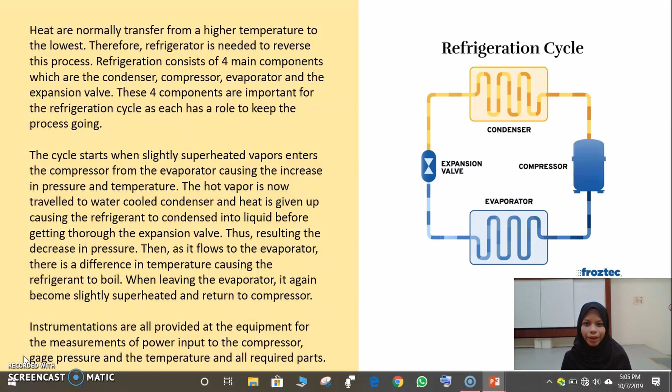So, instrumentations are all provided at the equipment for the measurement of power input to the compressor, the gauge pressure, and the temperature, and all the required parts. So, this refrigeration cycle can be applied in the refrigerator and air conditioning in our daily use. Next, I will explain about the theory of the experiment.

The method and the purpose have already been explained in the introduction. The principle of refrigeration: liquids absorb heat when changed from liquid to gas, and gases give off heat when changed from gas to liquid. And the vapor compression refrigeration cycle has 4 components, which are the compressor, condenser, expansion valve, and evaporator. Okay, first, the refrigerant's low pressure gas will flow into the compressor, and it will be compressed.

As it goes out from the compressor, it will go as a high pressure gas, and then the high pressure gas will flow into the condenser, where it will be condensed from gas into a liquid. And as it condenses, it will give off the heat to the surroundings. And next, the high pressure liquid will flow into the expansion valve, and the liquid will be restricted, and its pressure will be lowered.

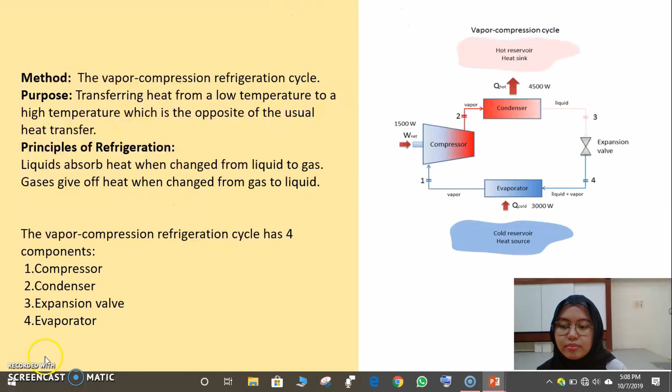And then the low pressure liquid will flow into the evaporator, and it will evaporate from liquid to gas, and it will absorb heat as it evaporates. And finally, the low pressure gas will flow back into the compressor, and the cycle will be repeated again. Next is the objective of the experiment.

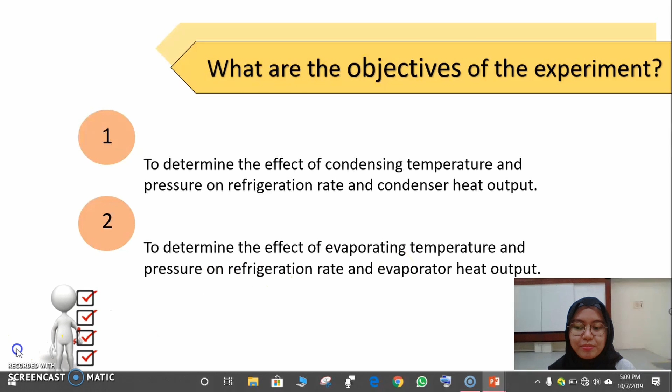First is to determine the effect of condensing temperature and pressure on refrigeration rate and condenser heat output. And the second one is to determine the effect of evaporating temperature and pressure on refrigeration rate and evaporator heat output. This goes to the evaporator, where it absorbs the heat in the refrigerator with the assistance of the evaporating liquid refrigerant. As the liquid evaporates, it decreases its temperature according to the decrease in its pressure.

Then it passes to the third component, which is the condenser. And the function of the condenser is to convert the refrigerant into the liquid form, reducing its temperature. And in the condenser, the heat flows out of the system to the environment. There are other components such as the barometer and the flow meter. The barometer measures the pressure inside the evaporator and the condenser, and the flow meter controls the flow rate of the fluid of the evaporator and the condenser respectively. And all the components are shown in this picture.

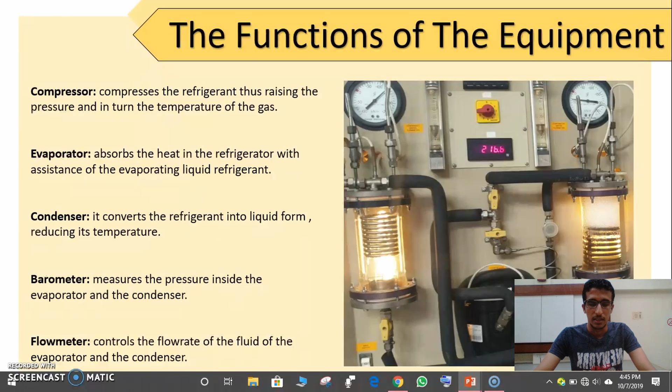And now for the operating procedure. After we all ensured the start up of the unit of the system by turning on the compressor and opening the water supply, we were ready to start our main experiment. And we started the main experiment with the first step, setting the evaporator water flow rate to 20 grams per second and allowing the unit to run for about 5 minutes.

Because the flow rates of the evaporator and the condenser are the main 2 parameters in the system, we need to fix one of them so we can have a precise measurement, and we chose to fix the flow rate of the evaporator to 20 grams per second and start with 30 grams per second for the flow rate of the condenser.

After that, we recorded all the system parameters, including the temperature in and out, the pressure, and the power consumed by the compressor. The third step was to reduce the condenser cooling water flow rate until the condenser pressure increases by approximately 10 kilonewtons per square meter, or 0.1 bar.

As we decrease the flow rate of the condenser, the pressure of the condenser increases, allowing the unit to stabilize. And again, we recorded all the parameters to study the effect of reducing the flow rate of the condenser and the other parameters such as temperature and pressure in the system.

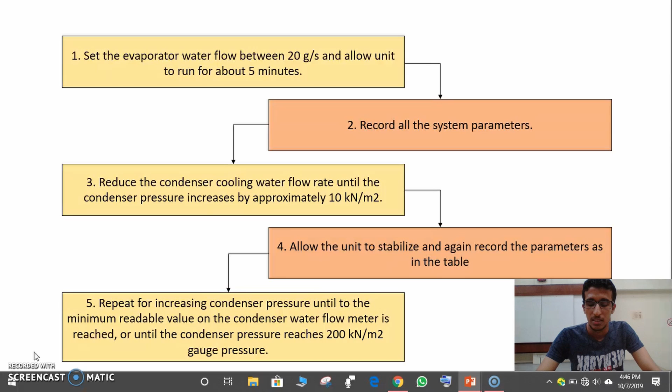And lastly, we repeated for increasing condenser pressure and decreasing the flow rate from 30 grams per second to 20 grams per second to the minimum readable value on the condenser. Discussion and results will be discussed next.

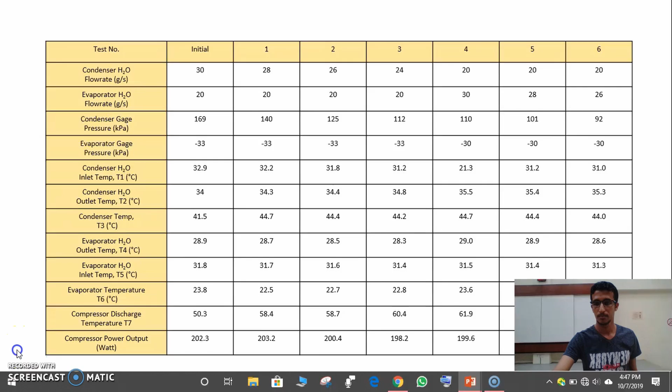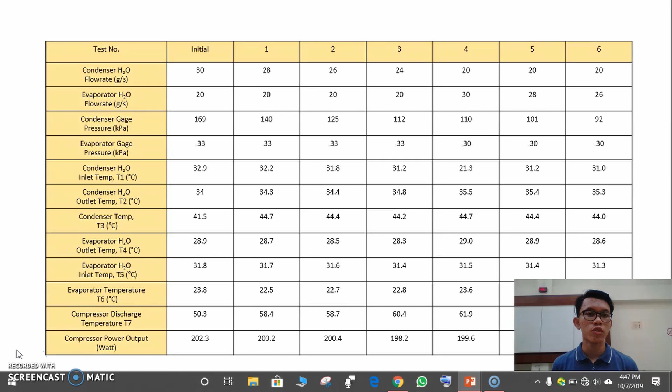Okay, next for our discussion. So this is the table of the results. As you can see, there's initial, 1, 2, 3, 4, 5, and 6. So this is all the information that we have gathered in the experiment. So we have condenser, evaporator, condenser temperature, evaporator, compressor, and also we calculate the heat capacity of this experiment.

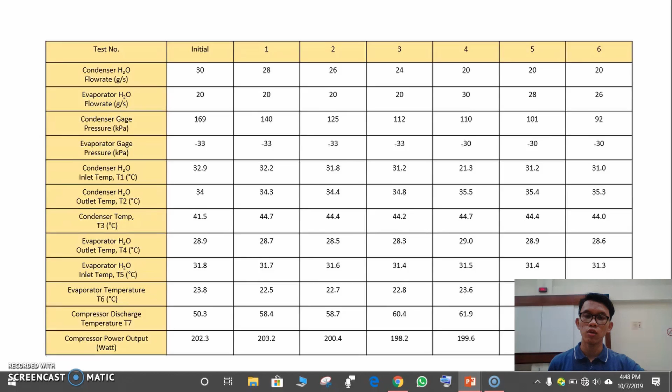So for this experiment, we observe that for the heat transfer rate of the condenser, based on the table, when the water flow rate in the condenser decreases, the heat transfer rate in the condenser also decreases. This is because the molecules of the water will be reduced, so the pressure of the molecules will be decreased as the temperature also decreases. Thus, the heat transfer rate in the condenser decreases.

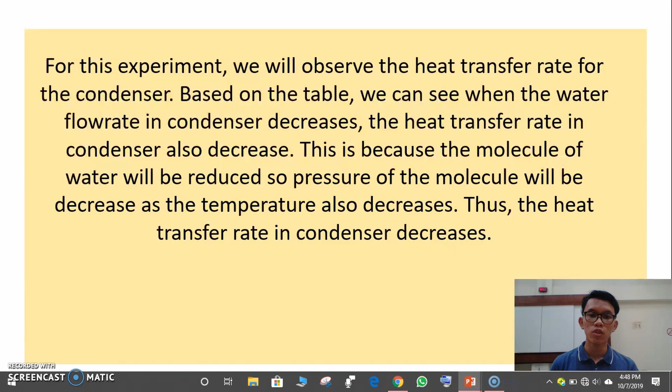So in the condenser, the refrigerant condenses at high pressure and temperature while rejecting energy to water flowing through the coil. This shows why at the condenser, both temperature and pressure are at higher values than at the evaporator. As we can see in this diagram, the saturation curve represents what state, vapor or liquid, and region, subcooled, latent heat, and superheat, the refrigerant is in. It also splits into two sections at the saturated liquid line and saturated vapor line.

So the question is, what do the saturated liquid line and the saturated vapor line show us in the basic refrigeration cycle? These lines show us the refrigerant has reached the 100% point. For example, saturated liquid means the refrigerant has reached 100% liquid at point 4, this one, and there is no vapor. This is only liquid. For the saturated vapor line, this line means the refrigerant is 100% vapor, point 3, this one. The saturated liquid is at point 4, the intercept between the high pressure line and the saturation curve.

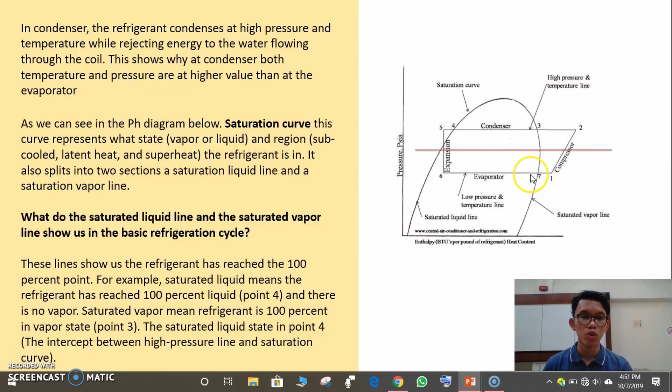Compressors cannot pump liquid. If one does pump liquid, it will damage it. This is why we need the entire liquid refrigerant to boil by point 7. After the entire liquid refrigerant turns to vapor and passes point 7, superheat occurs. Superheat is between point 7 and 1. So, superheat is life insurance for the compressor. It makes sure the compressor does not pull in liquid refrigerant from the evaporator.

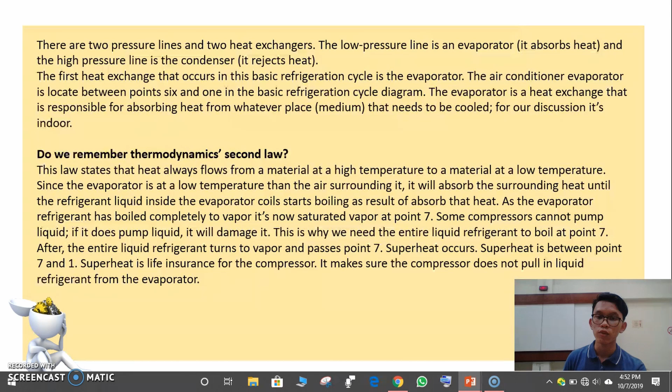So, as for the conclusion, special chemicals called refrigerants are used as the substance that enables the process to function. The cycle involves changes of state, and the energy consumption and heat loss associated with these phase changes are the key to the process. From the experiment, the heat transfer rate in the condenser decreases as the pressure and temperature decrease. Same goes for the heat transfer rate in the evaporator. It decreases when the temperature and pressure decrease.